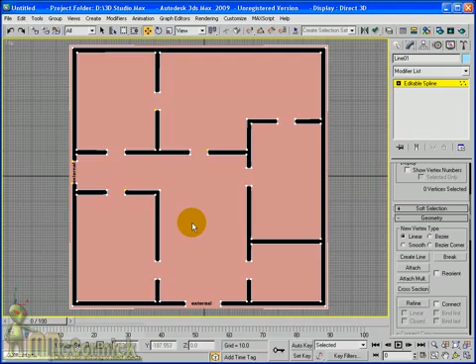Right, I've now aligned all of the vertex points to the walls as much as I'm going to for this tutorial. So you can see from the white points, if I zoom in again, you can see here they're all roughly in line with the walls. It's exactly what we want. So if I come right out and show you.

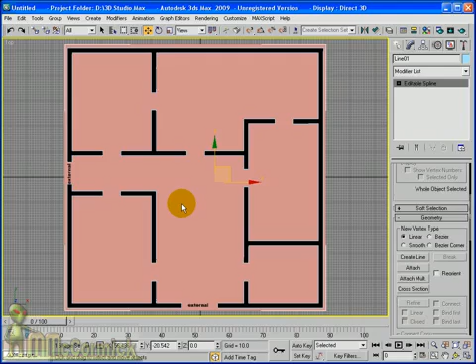Now what we're going to do is take this layout and extrude it up in height. I'm going to unselect the editable spline. It's a good idea to have this on the perspective viewpoint, so views, perspective, and zoom out a bit, because then you get a good idea about how high the wall's going to be.

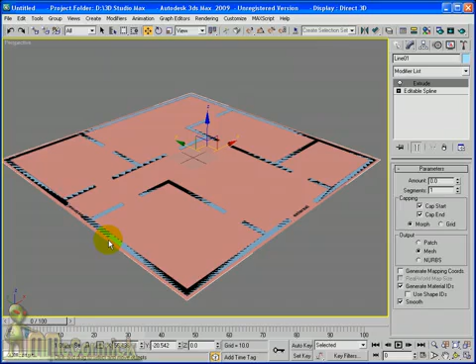So in the modifier list, if we select extrude, there we go, you can see that our lines for the layouts have now become polygons, and just by increasing the amounts we can decide how high we want these walls to be. I'm going to set it about 160 roughly. You can set yours exactly how high you need it.

I'm going to turn on the edged faces. Now the reason I turn on the edged faces is because I've got an extra step to add some polygons to make the tops of the door frames. And if I increase the segments, you can see we now have a white line down the middle of the walls.

I'm going to take these, just raise them up nearer the top of the door frames, and that will allow me to join across the top of the door frames to make these bits where the doors are going to go. So I'm going to add an edit poly modifier.

And change the viewport to front, zoom out a bit, and we're going to take all of these vertices in the middle and move them all straight up near the top. That's the perspective view, and we can see what we've done there.

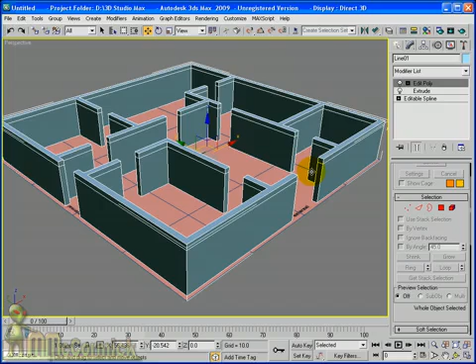So you can see now we have these points that we can now use to join across the tops of the doors. By selecting the polygon, if I zoom in and select that polygon there and that polygon there, you can see I now have both of them selected. What we're going to do is join this polygon here to that polygon there.

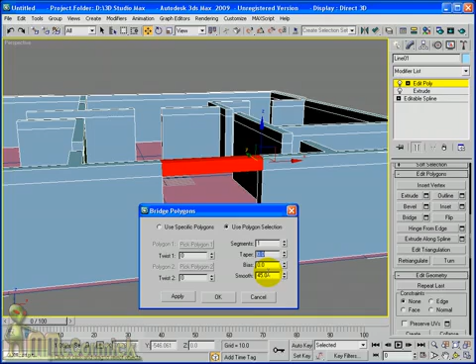We'll use Max's bridge tool. If I click on the bridge settings, you can see it's automatically created it using the default settings, which is use polygon selection, one segment, no taper, no bias, and smooth 45 degrees. All of that's done. So OK that, deselect it. There we now have a nice top of a door.

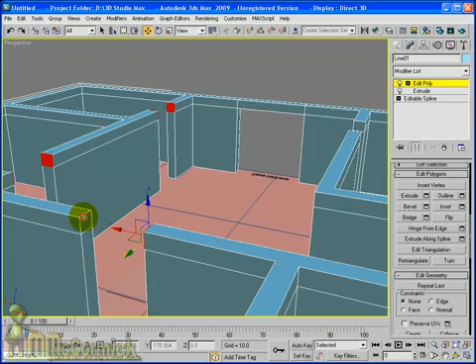You can do multiple door tops at once, as I'll show now. I'm just going to hold down Control, clicking on all of the door tops. If you miss any, it doesn't matter, you can just come back and select them later.

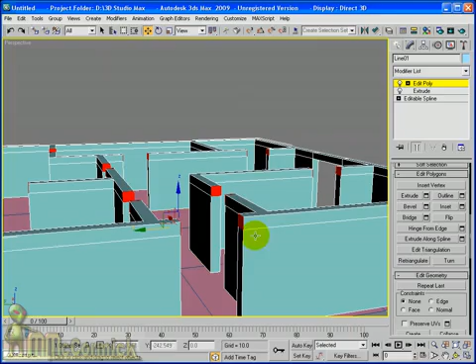Right, I think that's pretty much the last one there. And click on the bridge button, and there you go. We now have tops for all our doors. So one quick scan around, make sure I've not missed any. Nope, lovely.

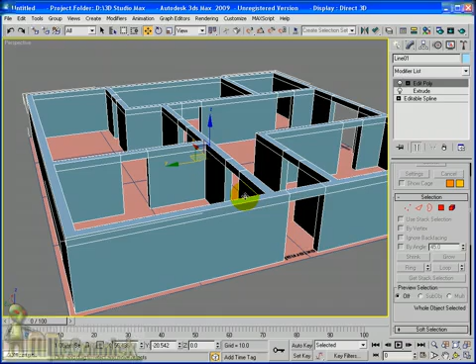Right, so deselect polygon. You can see now that we're almost there. The thing that's missing, unless it's underground, is windows. So if you're going to want windows in your scene, you're going to need to do it. There's a number of ways you can do it. I'm going to do it quickly, I'm going to use the Boolean.

The problem with using the Boolean is it can create long polygons, which especially for games can be an issue. In that case, you'd probably want to increase the amount of vertices you have along long walls, such as this one here. But for this quick tutorial, we won't worry about long polygons for now. We'll just have a go at popping the windows in.

So in the Create panel, under Geometry, we're going to create a box. Now I want to build it on this wall, so I'm going to use the Auto Grid, and build it directly on this wall. I'm going to have two windows on this wall, so I'll click and start there, and you can see the auto grid in action, making the box directly on the wall.

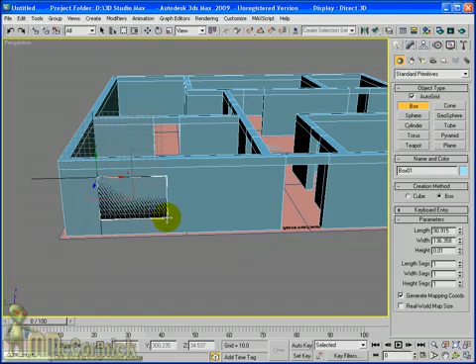I'm going to have that sticking out quite a large amount, and I'm going to move this box to there. Now I'm going to make all of the boxes where I want the windows to be.

So I'll create another one by cloning, and this will be a copy. To clone, I held down the shift key and just moved the box. If you're unsure, there is a video in my area about cloning and copying, instancing, referencing, which you can see here. So I won't explain too much. If you do want to go over that kind of thing, then have a look at that video.

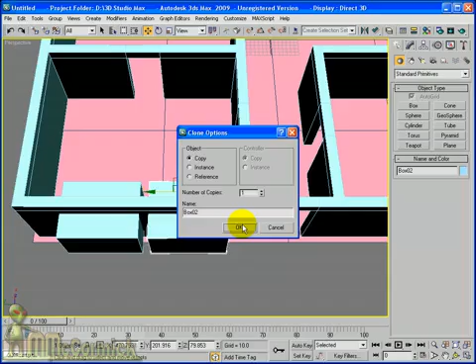Now I have two boxes that I'm going to use as windows. Just want to move this box slightly over a little bit. Now I'm going to create a boolean.

So if I select my wall object, under standard primitives, compound objects, we'll go for pro boolean. The pro boolean will take the walls and use these boxes to cut holes in the actual walls ready for the windows. We use this by clicking the start picking button and just clicking on the boxes. There you go, two windows all ready.

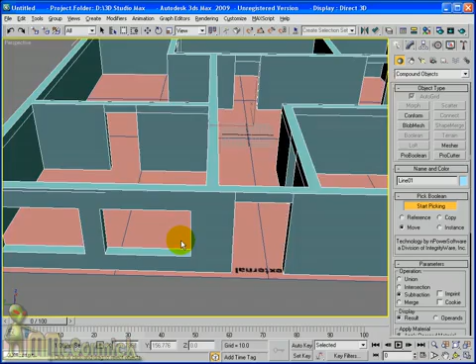Click on the start picking option again, because I don't want to continue picking until I've made some more boxes. So back to standard primitives, let's create some long and thin windows here.

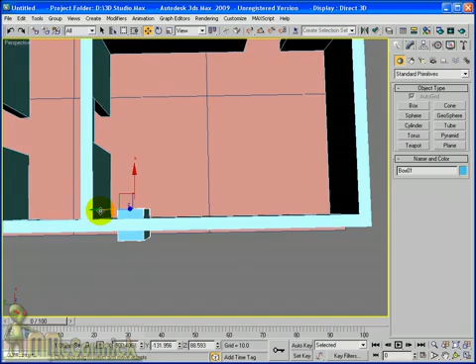So just making sure it's intersecting right through the wall. I think we'll have a row of windows there. That one's come out a little bit close, so control click on all of them and just drag it over so they're more in the middle of the wall. There we go.

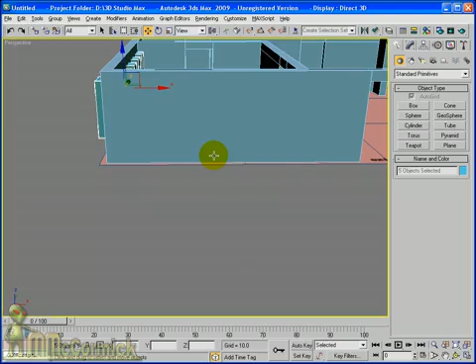What I'll do is take one of these ones, clone it, rotate it around, use the angle snap and rotate it 90 degrees. There we go.

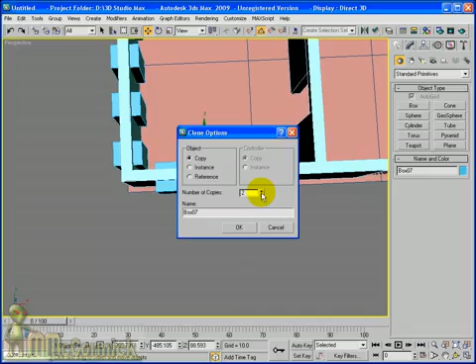Let's pop this through this wall here and we'll just have 3 on this wall. Quite a lot of windows in this one. And what we'll do is take all of these ones and clone them along to this wall as well.

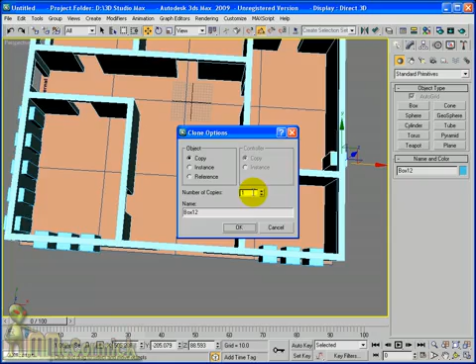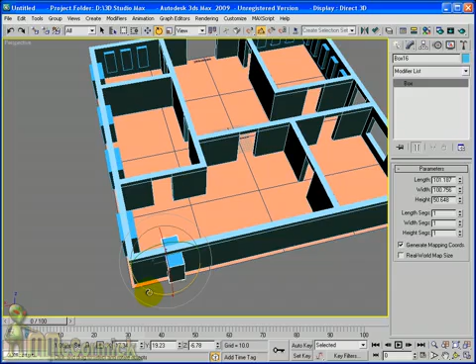Now I'm going to borrow this box, clone it right over to here, but make this one a bit wider. So you can see I'm just making lots of windows. We're looking for a 90 degree rotation there. Almost done. Last one. All done. So we now have quite a few windows ready for this.

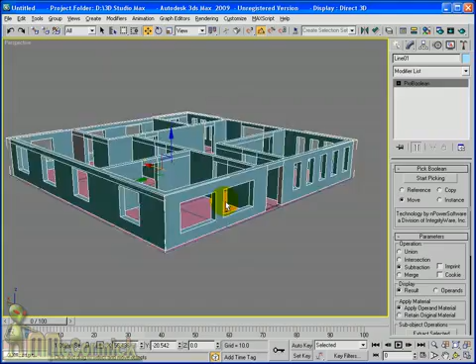So, selecting our walls object, start picking, selecting each of the boxes, and we're done. We now have nice areas ready for our windows to be put in. That didn't take too long. So that's how you'd actually extrude your floor plan.